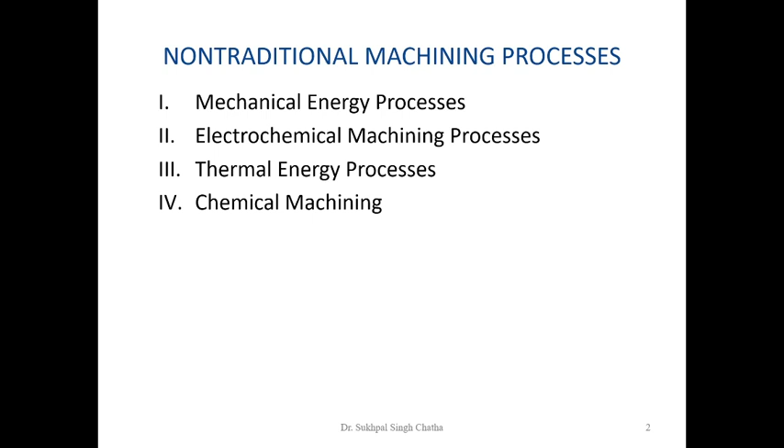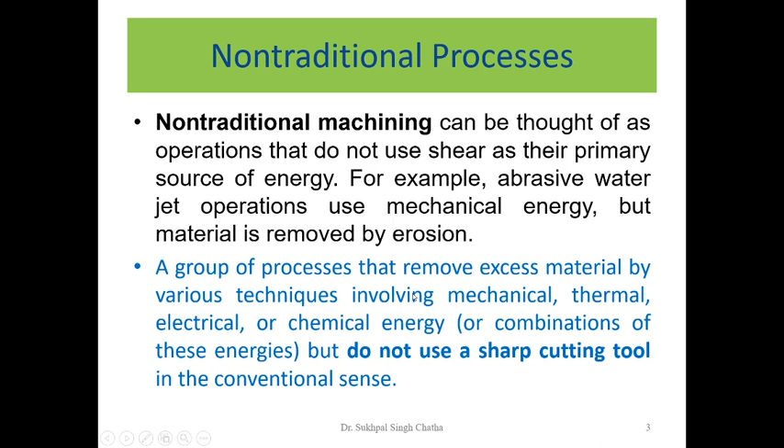Now, what is a non-traditional machining process? Non-traditional machining can be thought of as an operation that does not use shear as a primary source of energy. For example, abrasive water jet operations use mechanical energy, but material is removed by erosion. So no shearing takes place in this case. A group of processes that removes excess material by various techniques involving mechanical, thermal, electrical, or chemical energy, or a combination of these energies, but does not use a sharp cutting tool as in the case of conventional sense, are known as modern machining processes or non-conventional machining processes.

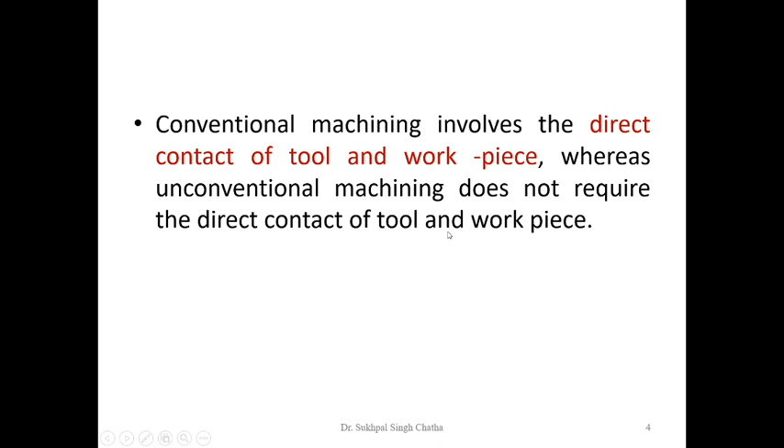In case of conventional machining, there is direct contact between the tool and the workpiece. Whereas in non-conventional machining methods, there is no direct contact between the tool and the workpiece, and there is no shear force. That is the reason fewer stresses are induced on the workpiece surface. So now why non-traditional machining processes? The need to machine newly developed metals and non-metals with special properties that make them difficult, impossible, or uneconomical to machine by conventional methods. In those cases, we need these non-traditional machining processes.

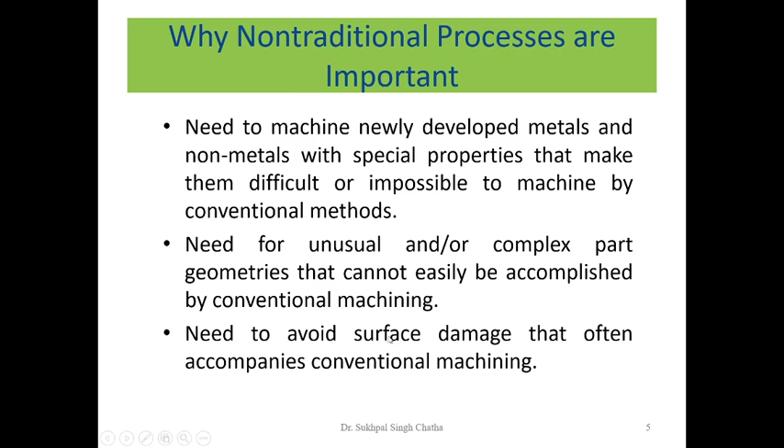In some cases, you need to cut very complex, unusual geometries, which cannot be accomplished with conventional machining systems. Again, the answer is non-conventional machining processes. Whenever there is a need to avoid surface damage, parts which have very low thickness, which are very fragile, cannot be machined with conventional systems, so we need to go for non-conventional methods. In case the materials have high hardness and high strength, the operation can only be achieved economically with modern machining processes.

If the workpiece is so flexible that it needs supports for cutting or grinding, then again there is a need for non-conventional machining processes. And as I discussed earlier, if the parts are very complex, or you need internal profiles, external profiles, small diameter holes, deep holes, there are no proper methods in the conventional system, so you have to move to modern machining methods. Sometimes the surface finish or tolerances required are so high that they cannot be achieved with conventional processes. Again you have to go for non-conventional methods.

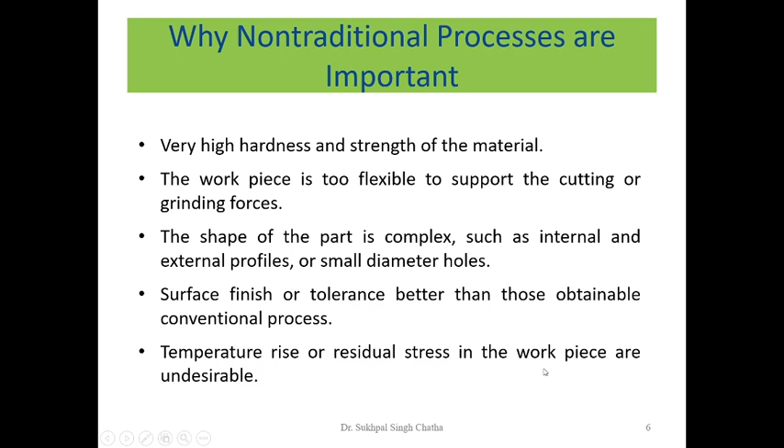In some cases the temperature rise is so much that it damages the workpiece surface, and in some cases we don't want stresses in the workpiece, so again we need to go for non-traditional machining processes. So how to classify these non-traditional machining processes? As I discussed earlier, they can be classified depending upon the type of energy used to remove the material. For mechanical energy, erosion of workpiece material by a high velocity stream of abrasives or fluids is a typical form of mechanical action. Examples are ultrasonic machining, water jet machining, and abrasive jet machining.

Another category is electrochemical energy processes. These use electrochemical energy to remove the material. Actually, it is the reverse of electroplating, and the process is called electrochemical machining. There are also processes which use heat to remove the material, categorized as thermal energy processes. They usually apply to a small portion of the work surface, causing that portion to be removed by fusion. A high localized heat is applied to the workpiece, inducing high temperature, and the material is melted and evaporated. Examples are electron beam machining, laser beam machining, and electric discharge machining.

Another category is chemical energy processes. In these, chemical energy is used to remove the material. Chemical agents selectively remove material from portions of the workpiece while other portions are protected by a mask. Under this category, the process is chemical milling. So this is how you can classify non-traditional machining processes depending upon the type of energy they use.